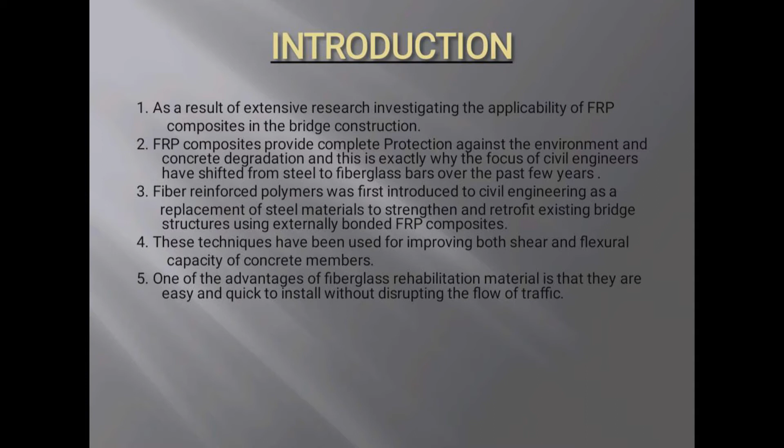Used to strengthen and retrofit existing bridge structures using externally bonded FRP composite, these techniques have been used for improving both shear and flexure capacity of concrete members. One advantage of fiberglass rehabilitation material is that they are easy and quick to install without disrupting the flow of traffic.

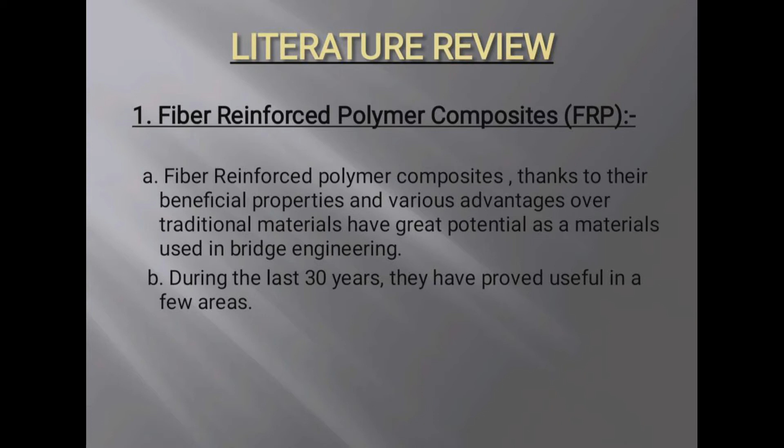Literature review. Fiber reinforced polymer composite, FRP. A fiber reinforced polymer composite, thanks to their beneficial properties and various advantages over traditional materials, have great potential as materials used in bridge engineering. During the last 30 years, they have proved useful in a few areas.

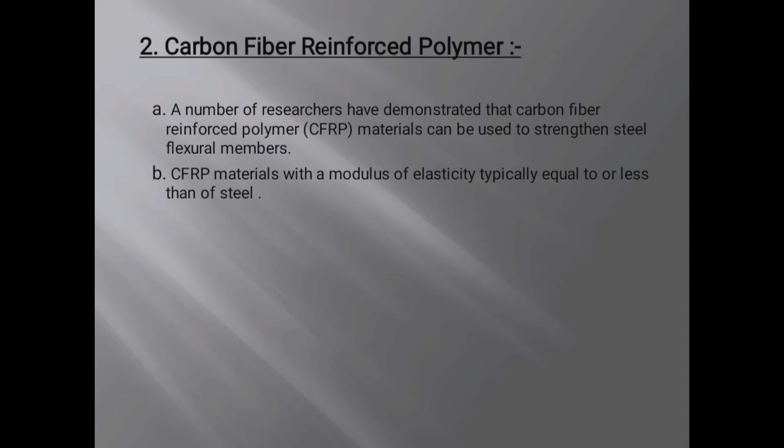Carbon fiber reinforced polymer. A number of researchers have demonstrated that carbon fiber reinforced polymer, CFRP, materials can be used to strengthen steel flexural members. CFRP materials have a modulus of elasticity typically equal to or less than that of steel.

Use of fiber reinforced polymer composite in bridge construction. The construction of the first all-composite bridge superstructure was in Miyun, China in 1982. Also, a number of constructions have been built in which FRP composite replaces traditional materials for structural elements, girders, bridge decks, and stay cables.

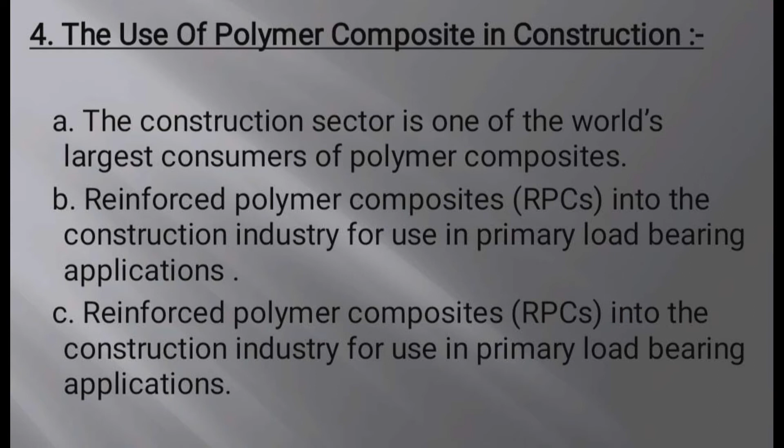The use of polymer composite in construction. The construction sector is one of the world's largest consumers of polymer composite. Reinforced polymer composites, RPCs, are used in the construction industry for primary load bearing applications.

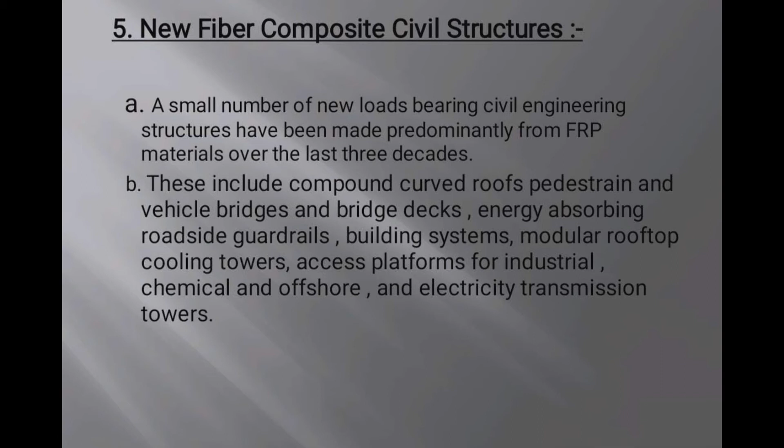A few new fiber composite civil structures. A small number of load bearing civil engineering structures have been made predominantly from FRP material over the last 3 decades. These include compound curved roofs, pedestrian and vehicle bridges and bridge decks, energy absorbing roadside guardrails, building systems, modular rooftop cooling towers, access platforms for industrial, chemical and offshore use, and electricity transmission towers.

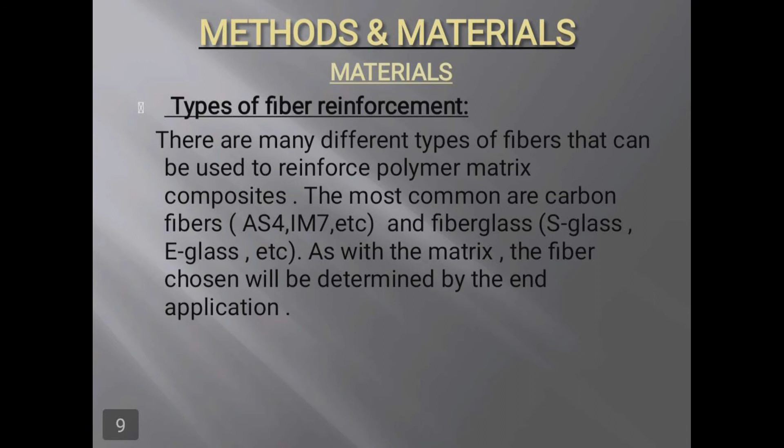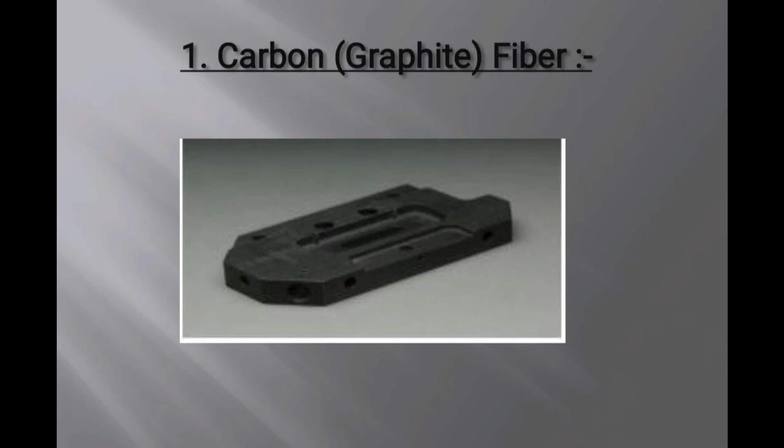Carbon fiber. Carbon fibers have conductivity, excellent combinations of high modulus and high tensile strength, very low CTE, and offer good resistance to higher temperature. There are 5 categories of carbon fiber generally used in composites: low modulus, standard modulus, intermediate modulus, higher modulus, and ultra higher modulus.

Fiberglass. Fiberglass is not as strong or stiff as carbon fiber, but it has characteristics that make it desirable in many applications. This makes it a good choice when dealing with electrical and broadcast applications.

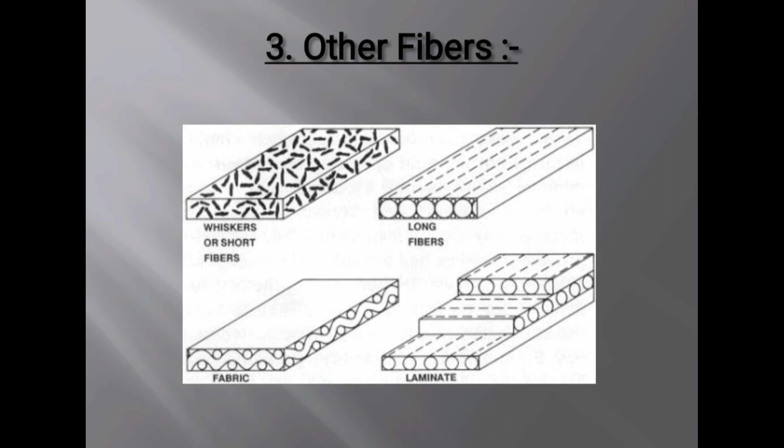Other fibers. While carbon fiber and fiberglass are the most common reinforcement in thermoplastic composites, there are other options. They may be attractive for compression applications.

Myself, Akshay Bharat Shinde. I am telling about two methods: manual and semi-automated methods. Manual process includes methods such as hand layup and spray up.

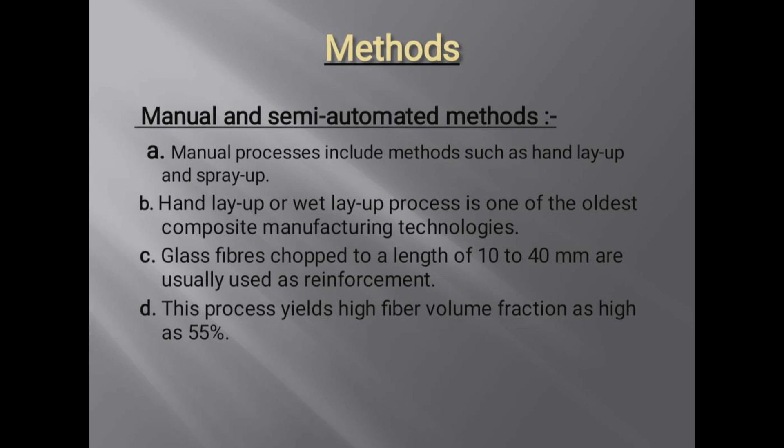Hand layup or wet layup process is one of the oldest composite manufacturing technologies. Glass fibers chopped to a length of 10 to 40 mm are usually used as reinforcement. The process yields high fiber volume fraction, as high as 55%.

Fully automated methods. This process, in its basic form, has been used for almost 60 years. The fully cured profile is pulled forward to a floating suspended saw which cuts it into defined lengths.

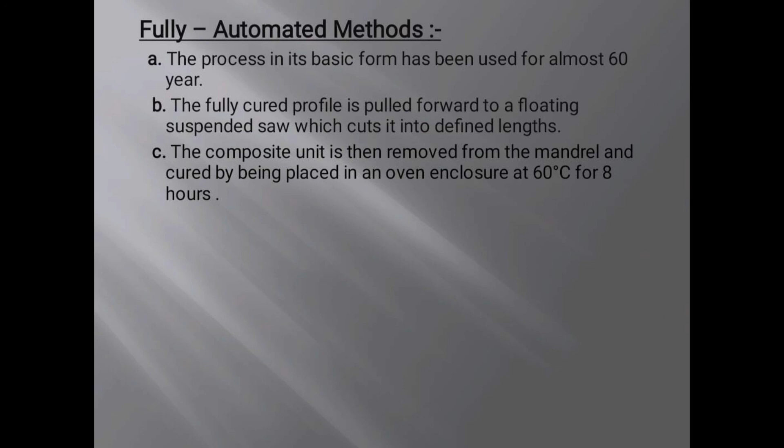The composite unit is then removed from the mandrel and cured by being placed in an oven enclosure at 60 degrees Celsius for 8 hours. Thank you.